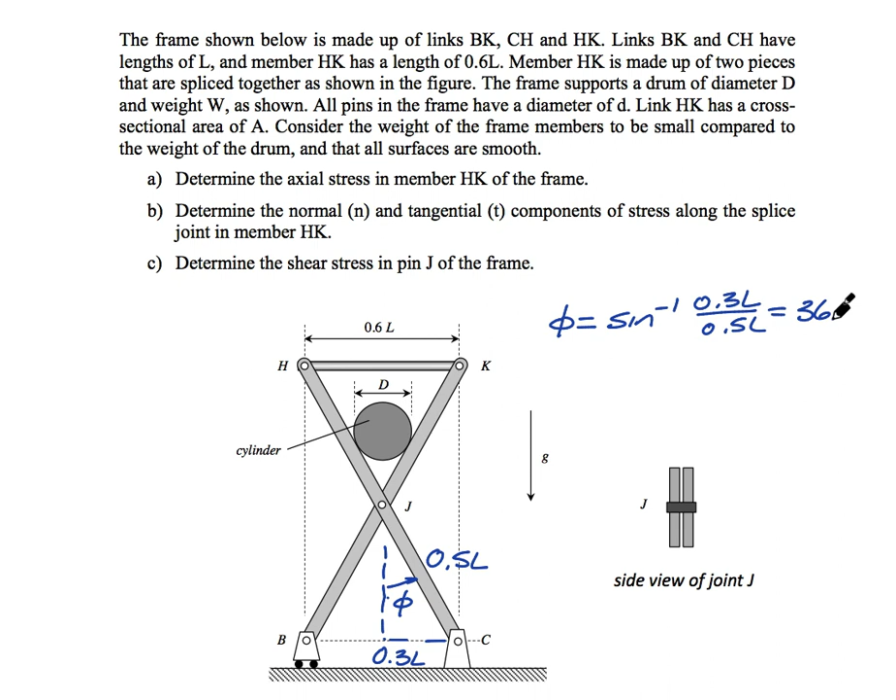Before we start, I'd like to do a little bit of trig. For example, this angle of phi, we're going to use that. Phi is going to be the inverse sine of 0.3L divided by 0.5L. That is, this distance here is 0.3L, and this hypotenuse is 0.5L. So that gives us that usual 36.87 degree angle.

We're also going to use a dimension here. I'm going to blow it up a little to make it more clear. If we look at this right triangle, where this angle is phi, this is the radius of the drum, which is d over 2. And what I'll need later on is this distance of b.

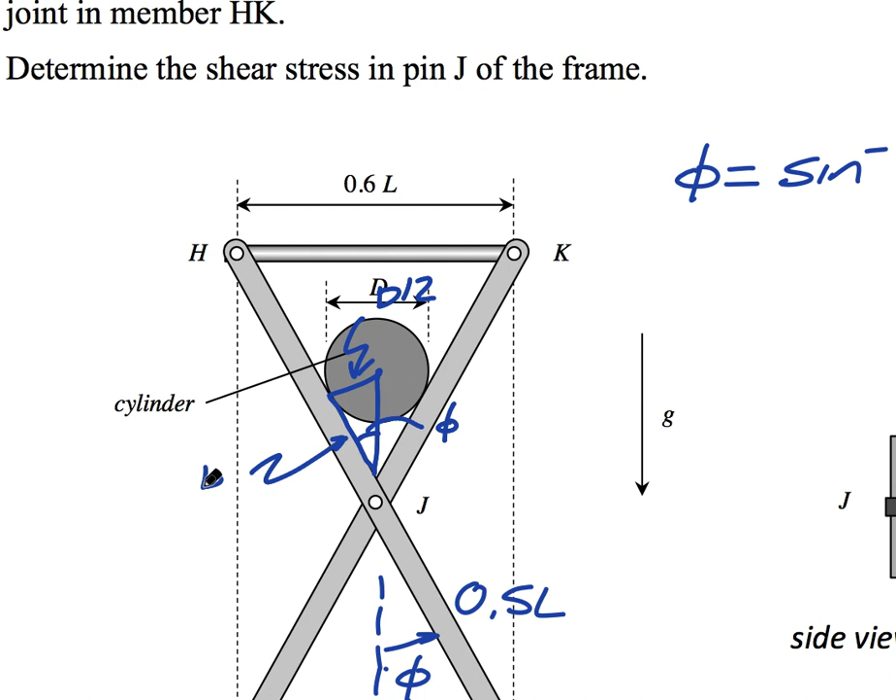So if I look at the trig here, the tangent of phi is going to be equal to the opposite side of that triangle, which is d over 2, divided by the adjacent side, which is b. From this, I can solve for b, where b equals the diameter of the drum divided by 2 tan phi, which we just found. So we've got phi and we've got that.

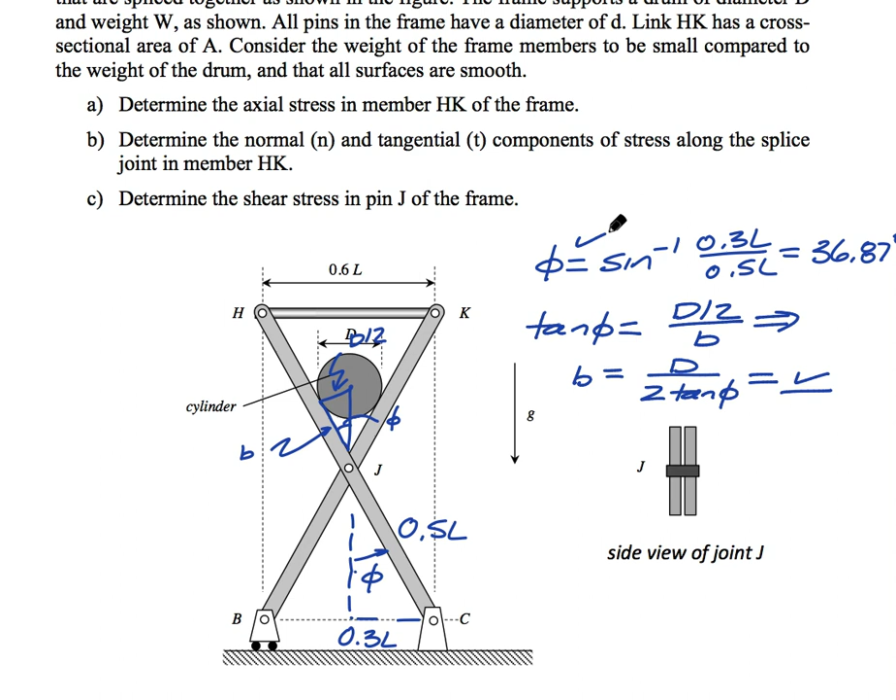I'm also going to do some equilibrium analysis on the frame as a whole. So let me draw the FBD right here on top of this: the roller is going to be BY, the pin is going to be CY, and the weight of the drum is W. From this FBD, if I make this X and this Y, and do a summation of moments about B...

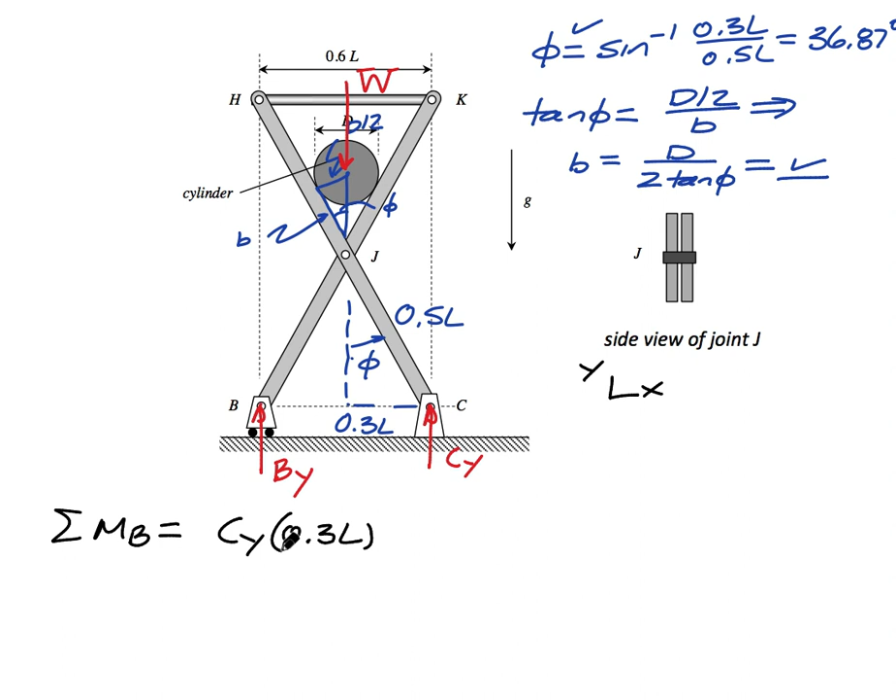I have CY, which has a moment arm of 0.6L, weight, which is going to have... that's going to be 0.6L, and W, which is going to be 0.3L, and it's going to have a minus sign in front. So for equilibrium, we see that the reaction force at C is simply going to be half of the weight.

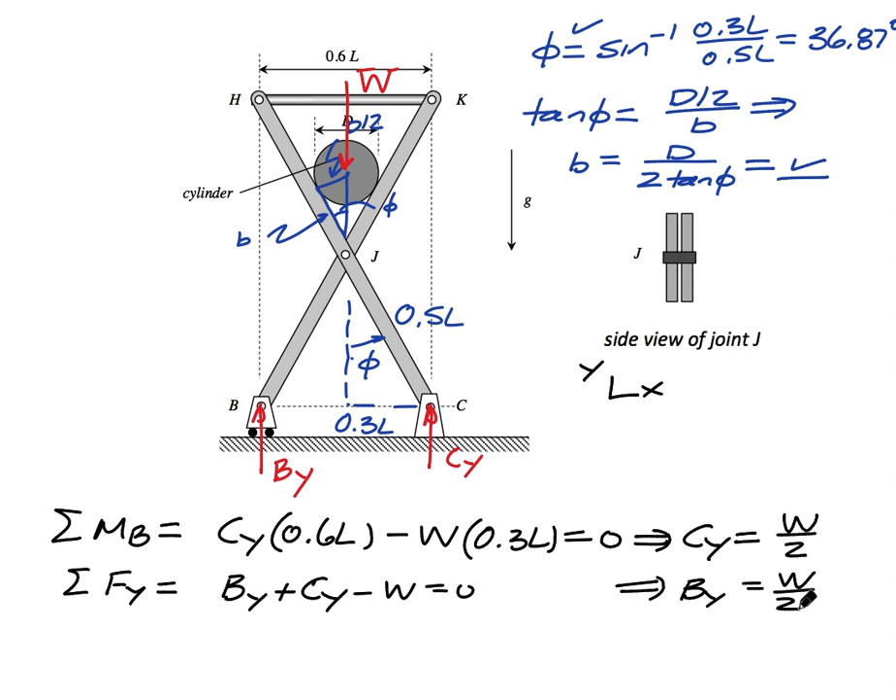When I sum forces in Y, I get the reaction forces at BY and CY minus the weight. From this, I see that BY is also equal to W over 2. So that helps me find those reactions.

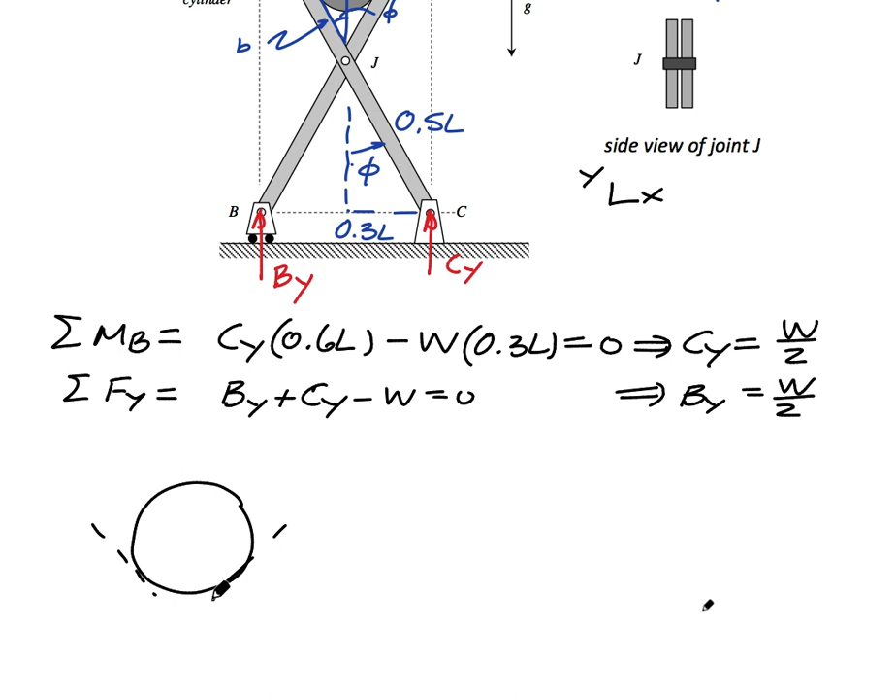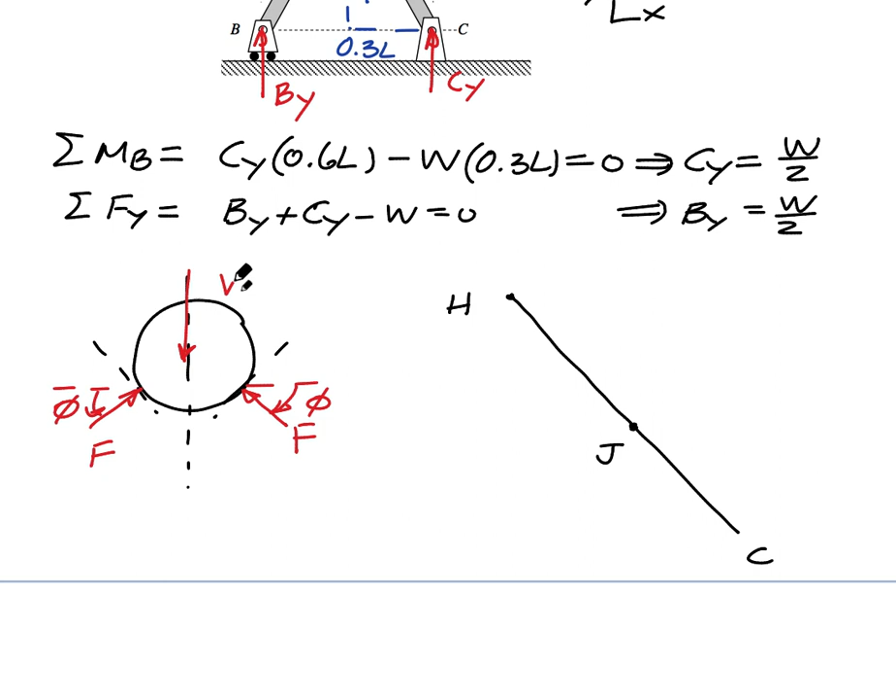Now I'm going to draw a free body diagram of the drum, and a free body diagram of this member HJC. The forces I'll draw on the drum: there's going to be this normal contact force, which I'll call F, one on each side, at an angle of phi from the horizontal. And of course, then the weight.

Then when I draw the free body diagram of member HJC, what I'll have here is the normal force in, perpendicular. There's that distance b that we just found. The force at H, F HK, which is what we want to find. Since there's a pin joint at J, there's going to be both an X and a Y component. And then there's the value of CY, which we just found above.

If I look at the drum, summing forces in the Y direction: minus W plus F sine phi. Since there are two of those, when that is set equal to zero, I find that the force the drum puts on member HJC is going to be the weight divided by 2 sine phi.

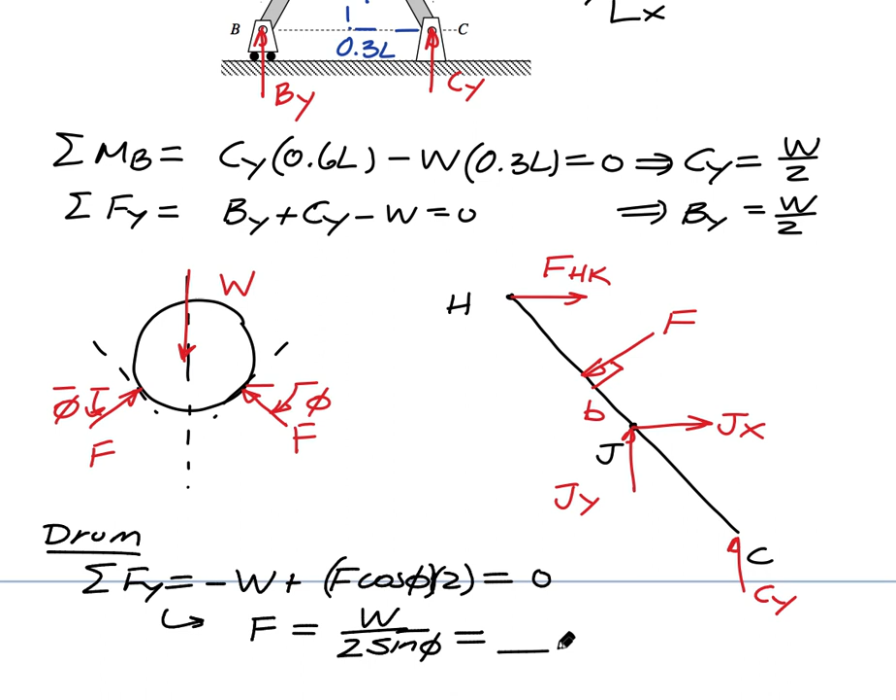Okay, so that's all known information. Now I'm going to look at member HJC. The first thing I'll do is take a moment about J. Moment about J: CY, the reaction force on the right side, has a moment arm of 0.3L with a plus sign.

The drum force there, F, as we just found B, that's F times B with a plus sign. And HK is going to be putting a force on there of F HK with a moment arm of 0.4 L, and that's going to be in the minus K direction.

So from this, I have an expression for the load that's carried by HK, and that's going to be 0.3 CY plus FB. We just found CY and F and B, so we can substitute those into here. And when I do, the result that I get for F HK is going to be 0.3 divided by 2 WL

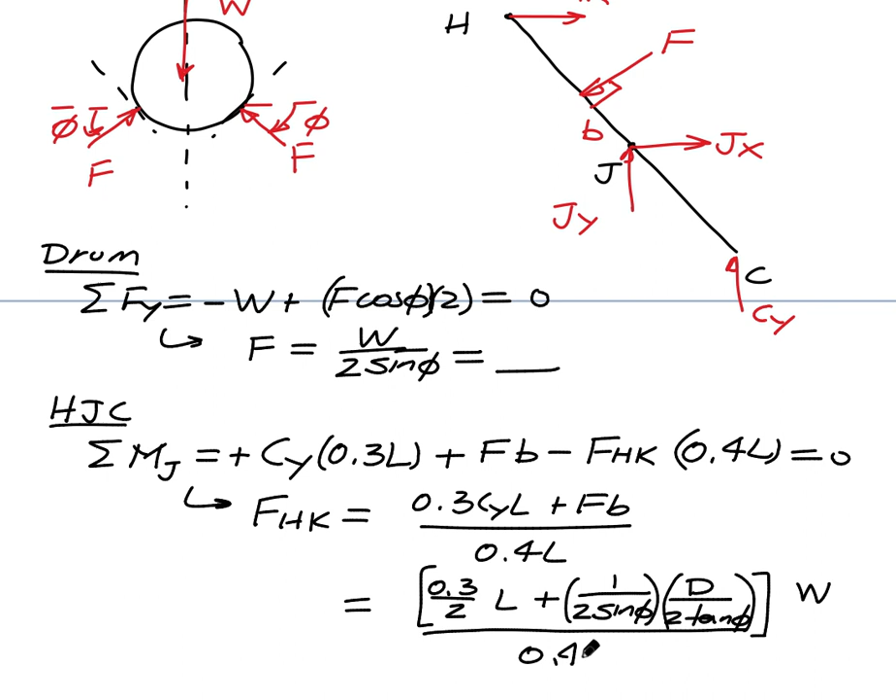plus 1 over 2 sine phi, putting in the expression for B, that's D over 2 tan phi, W, then of course there's going to be a 0.4 L there. So that gives us, in terms of things that we know, what the load is that's carried by member HK.

We're also going to sum forces in X and Y, where we have FHK plus the X component of the reaction there at J minus F cosine phi. From this equation, I see that the X component of that reaction is going to be F cosine phi minus FHK.

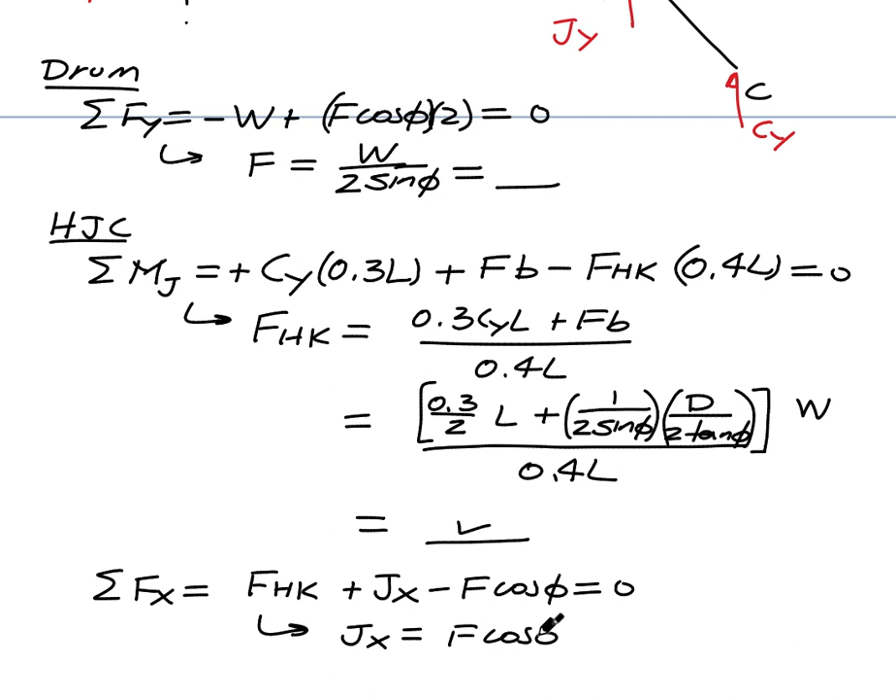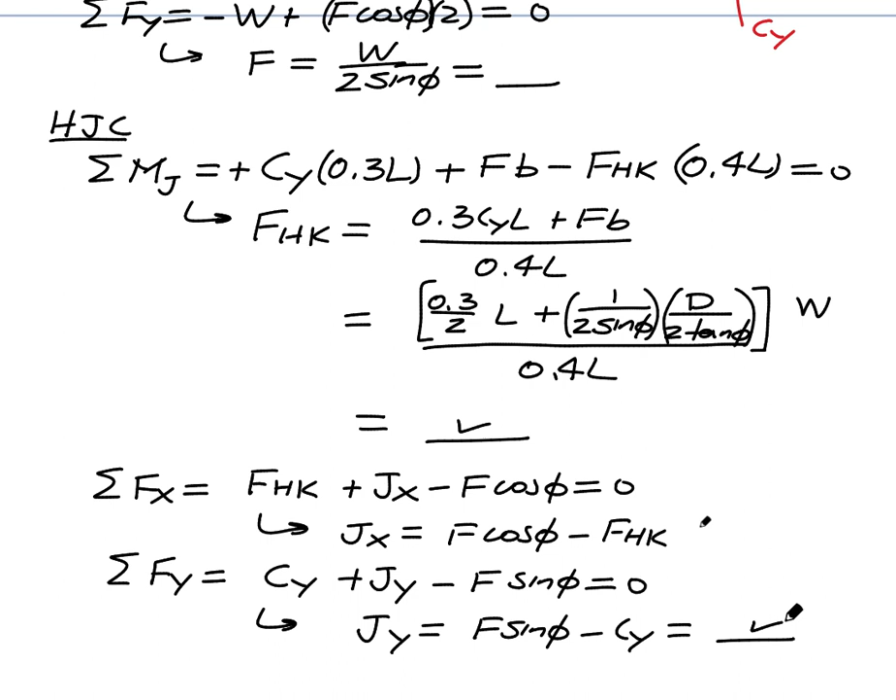I sum forces in Y. I get CY plus JY, the Y component of the reaction there at J, minus F sine phi. Again, I'm just looking at the FBD and writing down this equation. I see that the Y component of the reaction there at J is going to be F sine phi minus CY, and all this is in terms of things that we know. So we know JY and JX.

So what we would say then is that the normal stress, the axial normal stress, would just then be FHK divided by A.

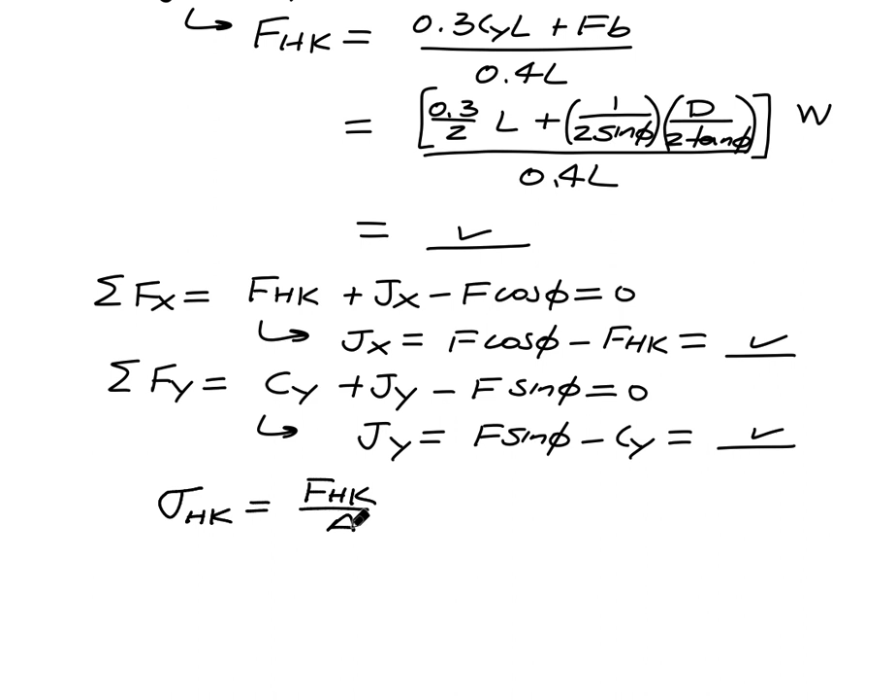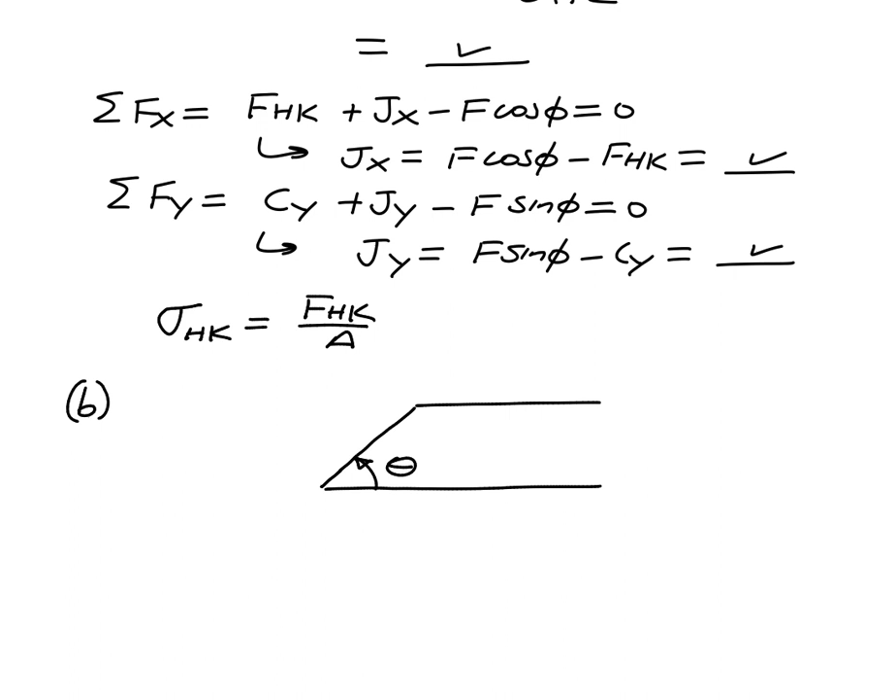For part B, though, what we're really asked to find is, what if there's a splice in HK? What if that splice has a glue joint, and we're concerned about the normal and the shear components of stress in that glue. That splice is at an angle of theta, and we just found FHK, so we know this axial load.

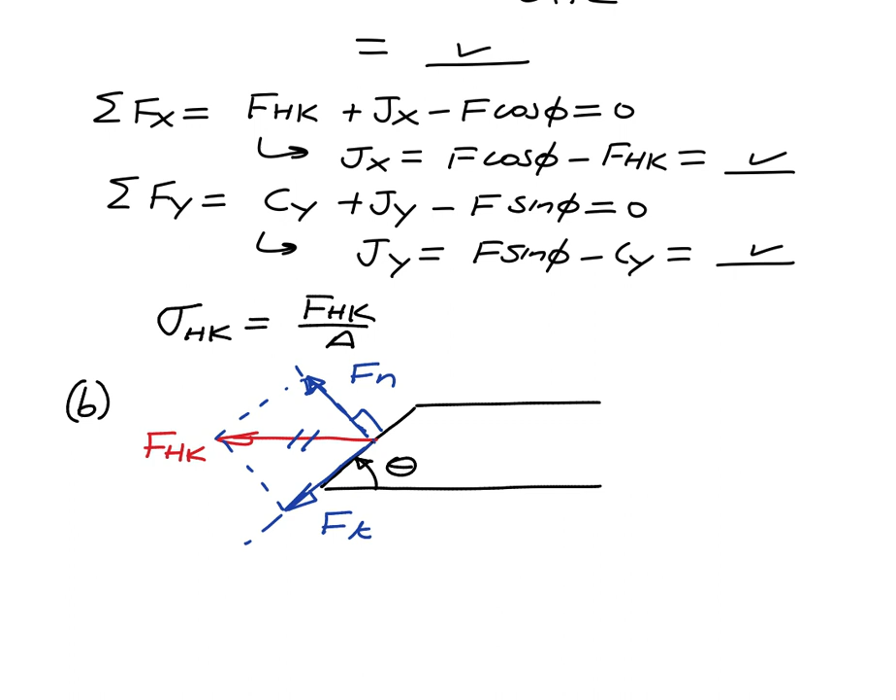So just from projections, the normal component is going to be FHK, normal to that face, times cosine of theta. So theta is here. So Fn, which is this amount right there—and it looks like I have written down the wrong trig function. This would be sine of theta.

And the tangential part, just looking at trig, that's going to be FHK times cosine. The area of this at this splice is A divided by sine of theta.

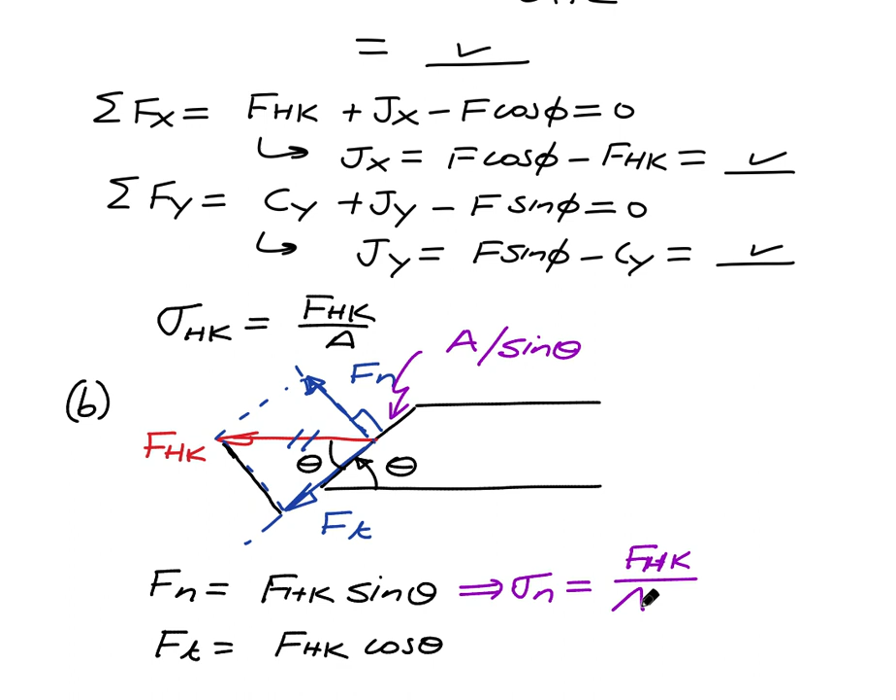So therefore, sigma n is going to be equal to FHK divided by... let me try that again. That's going to be Fn divided by A over sine theta.

And so that's going to be FHK times sine squared. This says that our shear stress, that is the stress component that's tangent to that splice, is going to be Ft over the area over which it acts, and that's A over sine theta. So that's going to be FHK sine theta cosine of theta. So that's the normal and tangential components of stress that we have along that splice.

Lastly, what we want to do is look at that joint J. What we saw was acting on that pin were the reaction components of Jx and Jy. We don't really care about Jx or Jy individually, but what we care about is the resultant of those two. So J is simply the magnitude of that reaction, the square root of Jx squared plus Jy squared.

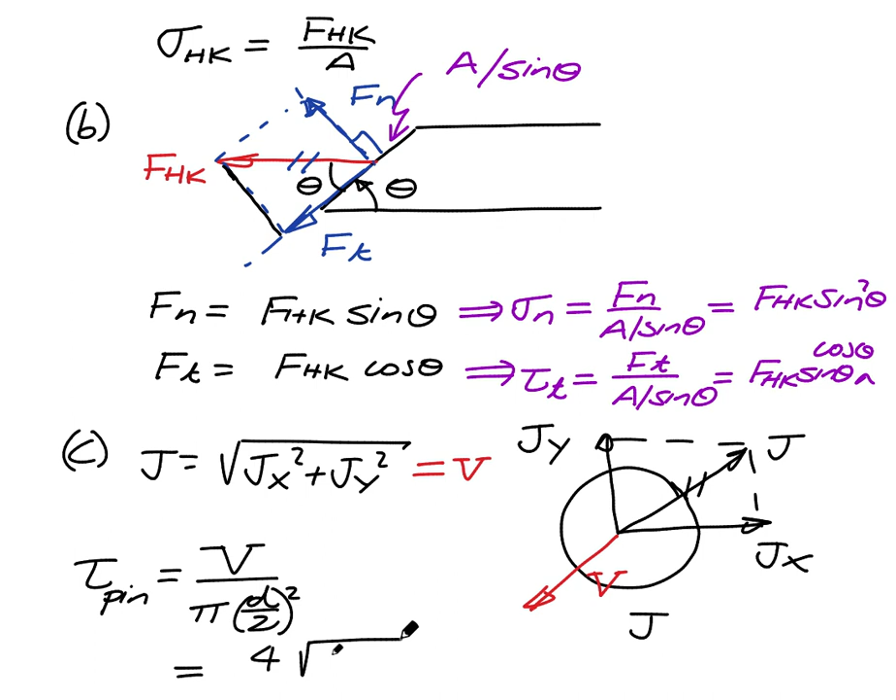So that's going to be equal to 4 square root of Jx squared plus Jy squared, divided by pi d squared.

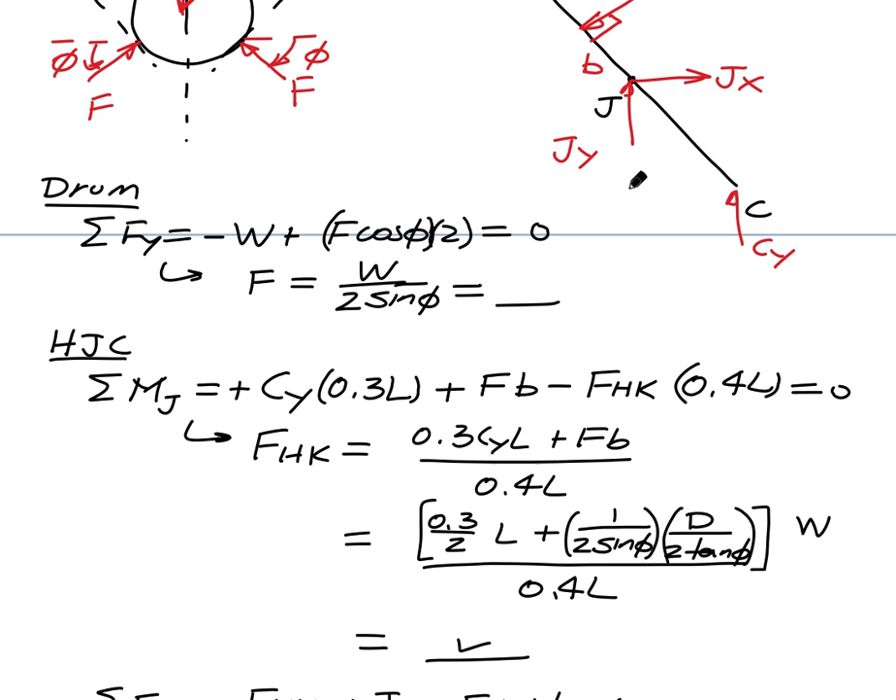So we were asked to do a lot of work here. One, we did a considerable amount of effort trying to find the external reactions acting on the frame, Cy and By, finding the normal force that the drum exerts on that member there, HJC, F. We used that same FBD of HJC to find the load carried by member HK. Other equilibrium gave us the reactions there at the pin.

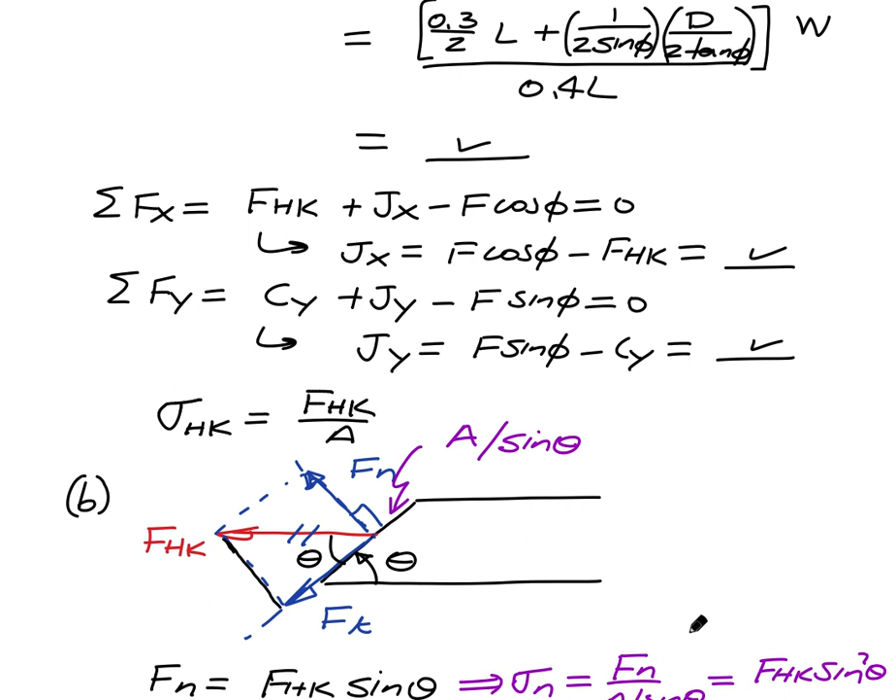But then we went to part B and we looked at the projections of HK, FHK, on the normal and tangential plane of that splice in order to get the normal and tangential components of stress. And then we looked at the shear force in the pin, and from that we extracted the shear stress.